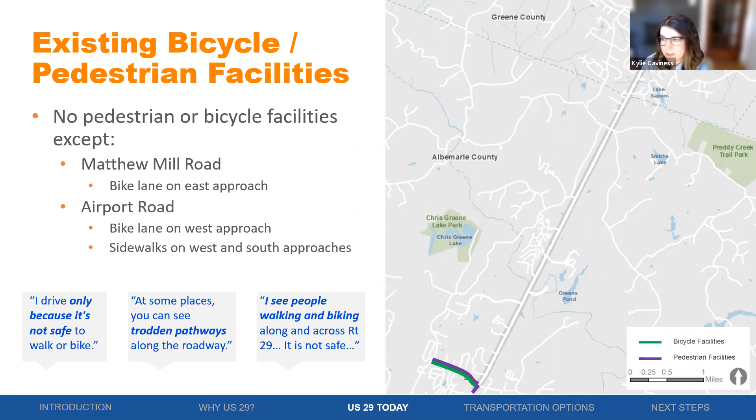Similarly, there is a lack of existing transit facilities and stops on the corridor. 2 transit services do run in the vicinity of the study area, Charlottesville Area Transit, otherwise known as CAT, and Jaunt. Both of those are stakeholders with us for this study. Jaunt runs a connect line for commuters into Charlottesville. Its closest transit stop is about 900 feet south of Airport Road, which is technically out of our study area. CAT's closest stop is actually 3 miles south of Airport Road, again getting closer to Charlottesville.

But similar to the bike ped facilities, feedback from the survey showed that there is a desire for transit facilities throughout the study area. Specifically, themes revolved around transit opportunities to hospitals, down to Charlottesville, other retail areas closer to the city, as well as transit being increasingly helpful for the aging population up north.

Now shifting a little bit into crashes along the corridor, we pulled crash data from 2015 to 2020 to get a sense of existing safety conditions. There were 798 crashes between those years, with 33% reporting injuries or fatalities.

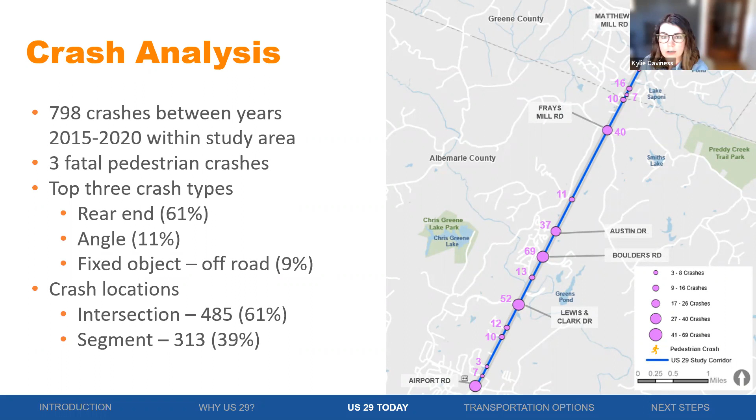So now for traffic operations, level of service, otherwise called LOS, is a metric that we use to determine the quality of an intersection. It's based on a scale of A through F, where A is ideal free flow conditions, and F is poor, significantly delayed conditions. In urban conditions, we aim for level service D or better.

There is more of an operations concern during the morning rush hour, which makes sense given the heavy southbound traffic through down to Charlottesville, which are likely commuters. In addition to the LOS results, 2 intersections operate over capacity, meaning that the volume of the intersection exceeds what is actually able to be processed. Those intersections are US 29 at Frays Mill Road and at Airport Road.

Looking at existing conditions in the PM, we see a less strained corridor with overall less capacity and level service issues. Still, there are 2 intersections operating worse than LOS D, and Airport Road is over capacity.

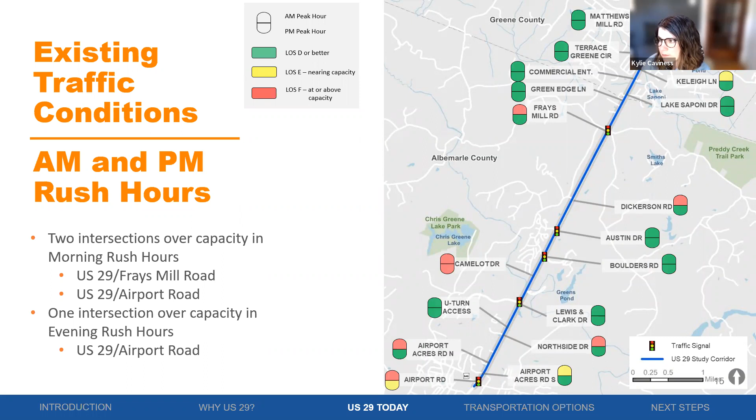There are some planned improvements along US 29 moving forward in the study corridor before we look at future conditions. The largest roadway improvement is the Route 670-607 connector, anticipated to be a 2-lane road connecting Route 670 and 607 to US 29 by 2025.

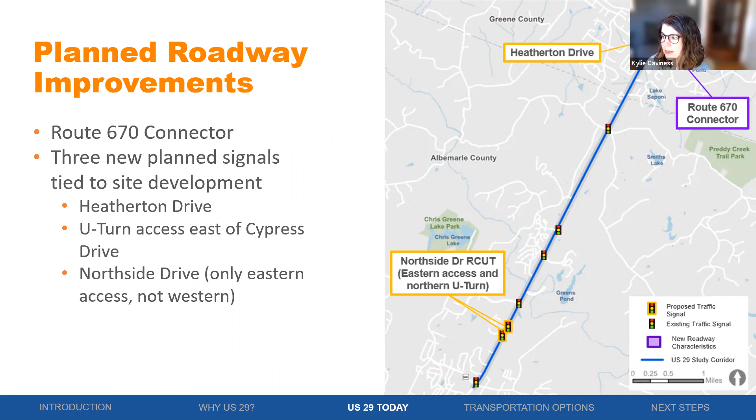Three new signals are also planned and tied to site development: Heatherton Drive up north, the eastern access, and the northern U-turn at the Northside Drive R-cut, which has recently been put in. In our no-build conditions, we assume a future year of 2045, as Andy said, and we analyze the corridor assuming these improvements are in place.

In the future no-build traffic conditions, a growth rate was applied to volumes based on the statewide planning system historic growth graphs. In the AM, a number of intersections operate at level of service E and F, and 5 intersections are over capacity, which is 3 more than what we saw in existing conditions.

In the PM future no-build conditions, we see more intersections operating at LOS E and F than under existing conditions. 6 intersections are over capacity as opposed to only 1, which was Airport Road in existing conditions. So this is a synopsis of what we've looked at—crashes, facilities, and operational conditions for our study so far.

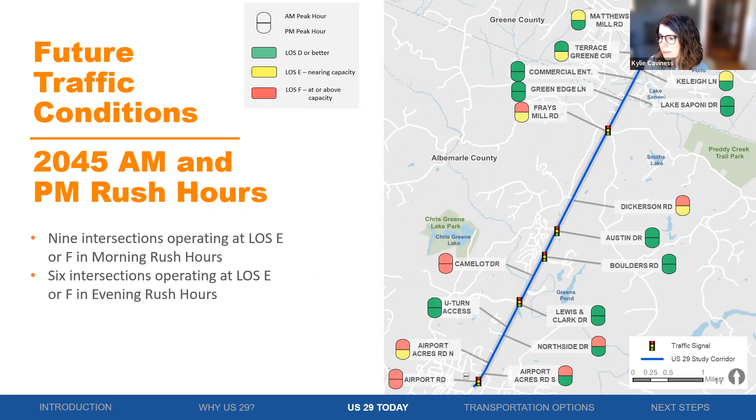As I stated about the comments earlier, the quotes I was pulling—we did release a survey in tandem with the public meeting last September, and we asked for your input related to the project study goals and your priorities.

What problems do you face? What opportunities do you imagine for the corridor? This allowed us to gather qualitative and quantitative data from you all, and we received over 370 responses to the survey. So thank you.

We also asked what transportation issues and opportunities people see for US 29. Participants could select more than one answer for all the questions we provided. We found that 92% of participants observed congestion and queuing, along with 63% reporting speeding, and nearly 40% reporting lack of pedestrian and bicycle crossings.

When we asked what investments would improve the driving experience, we found that 80% of respondents chose reduced congestion and queuing. We also found that 57% voted for intersection improvements and 42% voted for reduced turning conflicts.

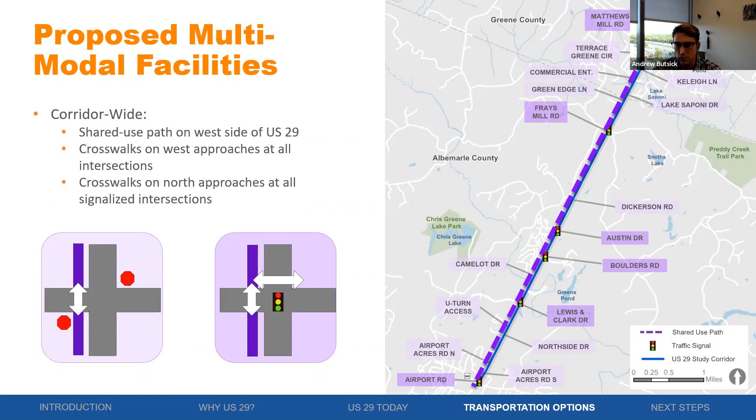For all intersections, there'd be a crossing on the west side to cross the side street, and at signalized intersections, a signalized pedestrian crossing along the north leg, so pedestrians and bikes can safely cross US 29. If you cross at an unsignalized intersection, it's a little less safe, because it's harder to control vehicular speeds. But I think this will go a long way toward improving pedestrian and bike operations, and hopefully in the future lead to the ability for transit along the corridor. Right now, if you were to just add stops along the corridor directly, there aren't many places for pedestrians and bikes to safely access the adjacent land uses from there.

Before we get into some of the individual alternatives at the intersections, I want to provide a high-level overview of some of the innovative intersections that came out of that VJuST analysis, as I mentioned earlier, which screened for over 20 at-grade intersection types. I'm not going to present all 20 - I think there's only a handful that make sense along this corridor.

The first one is a restricted crossing U-turn, or R-CUT for short. If you look at the graphic on the right, imagine US 29 running horizontal along the page and one of the side streets running north-south. This intersection redirects left turns and through movements from the minor streets to make a right turn at the main intersection - highlighted by the purple or maroon line. So they make a right turn at the main intersection instead of a left, travel downstream, and make a U-turn at a new median opening. After making that U-turn, they either make a right turn to complete their through movement, or continue through to complete their left turn movement.

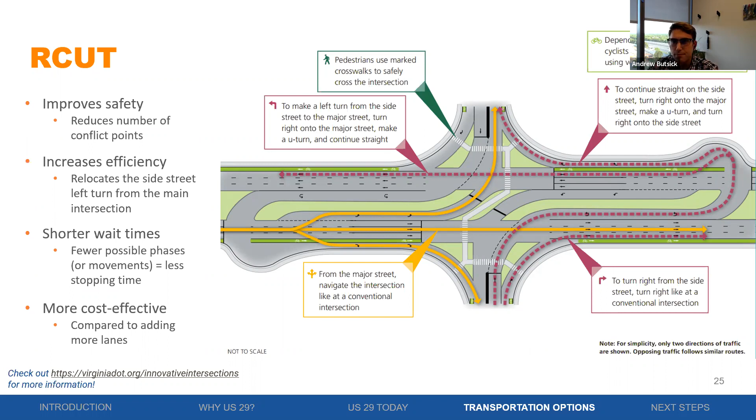The benefits are similar to the R-cut, a bit different in how movements are served, but it redirects those left turns and eliminates left turn phasing at the main signal. This reduces conflict points and the potential for high severity angle crashes, T-bone crashes at the intersection. It improves operations because you're removing signal phases.

It makes it more efficient for all movements, so all movements will see a benefit in travel time at the intersection, even though there's a little out-of-direction travel for left turns. It still overall is expected to operate more efficiently for most movements in terms of travel times.

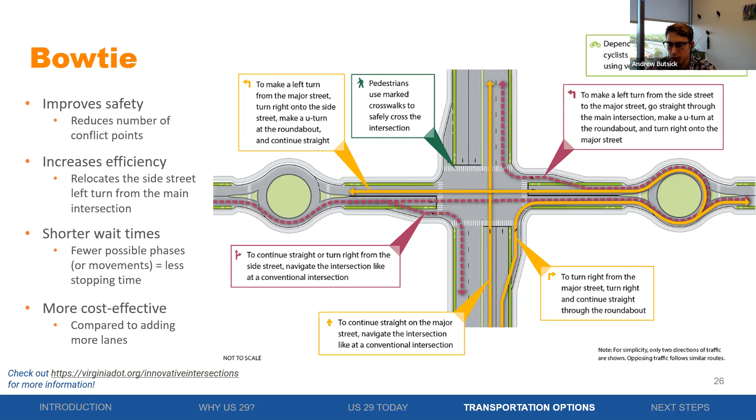The last one we're going to highlight tonight is a quadrant roadway. This option redirects left turns for all movements at the main intersection and shifts them over to a connector roadway, seen in the upper right. This new adjacent roadway serves those left turns.

You see a lot of the same benefits we talked about with the Bowtie and the R-cut at the main intersection, where eliminating those left turns helps improve safety by reducing the number of conflict points and the potential for angle crashes. It increases efficiency because you remove additional signal phases and provide more green time to all other movements.

But the one major downside to this is cost. Adding a new connector roadway isn't cheap, so you won't see us recommend this anywhere there isn't already a connector road planned or in place, because that can be cost prohibitive to design and add. Most places where we're implementing this, that natural connection is already in place.

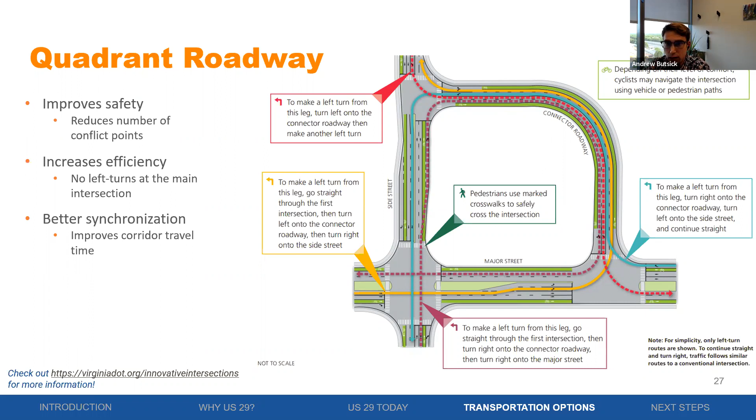Thanks, Andy. Just reiterating, these concepts are very much in the planning stage, no funding or schedule in place. We want to hear your thoughts and feedback on these potential ideas. So let's jump in. First, we have the intersection of US 29 at Matthew Mill Road. This intersection is along a segment VDOT has noted as a potential safety improvement location, with both safety and operational concerns. We have four alternatives at this intersection.

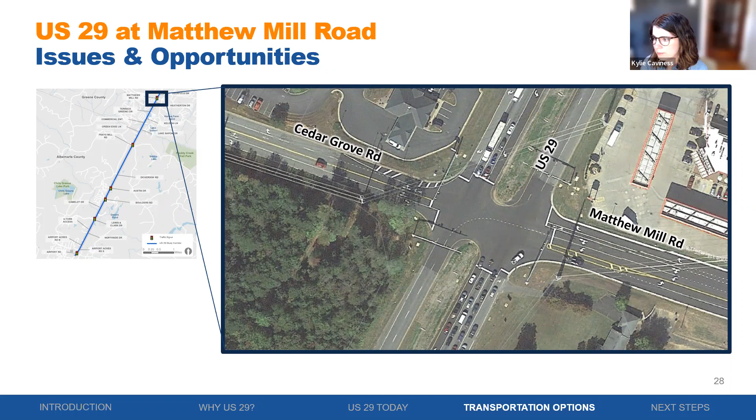This alternative is the modified signal with some adjustments to lane configurations. It modifies the existing signal to convert the minor leg, Cedar Grove and Matthew Mill Road, from split phasing to protected-permissive phasing. So instead of Cedar Grove Road all going at once and then everyone from Matthew Mill going at once, it would be a concurrent phase. Additionally, a separate left, through, and right lane are provided on the eastbound approach, which you'll see here.

The benefits to this improvement include reduced travel time. There's no need to redirect travel, everyone is going in the direction they are headed, and unlike an RCUT or a Bowtie, there's no rerouting needed. There are also added signalized pedestrian crossings on the western and northern sides of the intersection, as we specified in the proposed multimodal improvements. The challenge here is there's some right-of-way acquisition that would be needed for the additional lanes.

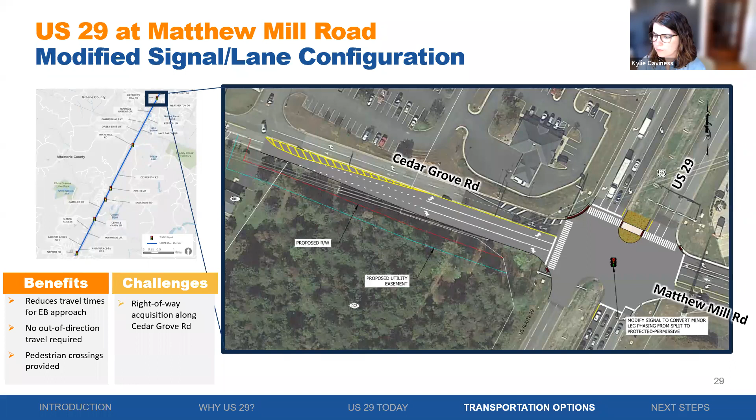I will say, while we move through these, they might seem a little fast. Once we get through them all, we'll talk about next steps, and there will be an opportunity for you to take a look at them in more detail and depth and provide us that feedback, instead of me spending 30 seconds on each alternative here.

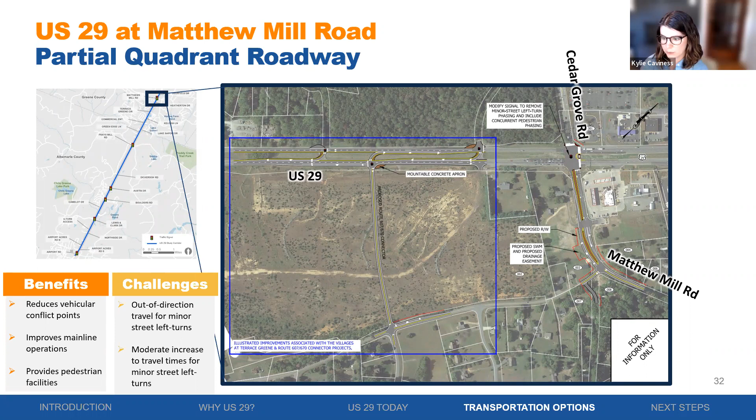All right, so jumping south a little bit, we have the intersection of US 29 and Frays Mill Road. Today, this intersection is identified by VDOT as a potential safety improvement location, with significant operational concerns. We had 3 alternatives for this intersection to share with you today.

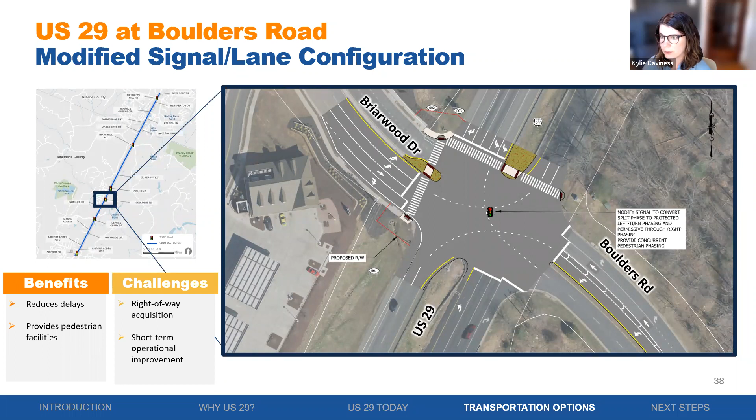We also have an R-cut, which converts the intersection to direct Boulders and Briarwood traffic to make that right turn and make the U-turn at the proposed median breaks.

Again, this means reduced travel time and the addition of pedestrian signals. Most importantly, comparing the two alternatives, you're reducing the risk of angle crashes by removing those conflict points.

The challenges with an R-cut compared to a signalized modification are that it's more costly. Some right-of-way will need to be acquired, and some minor out-of-direction travel is needed for those trying to make a left or a through movement on Boulders or Briarwood Drive.

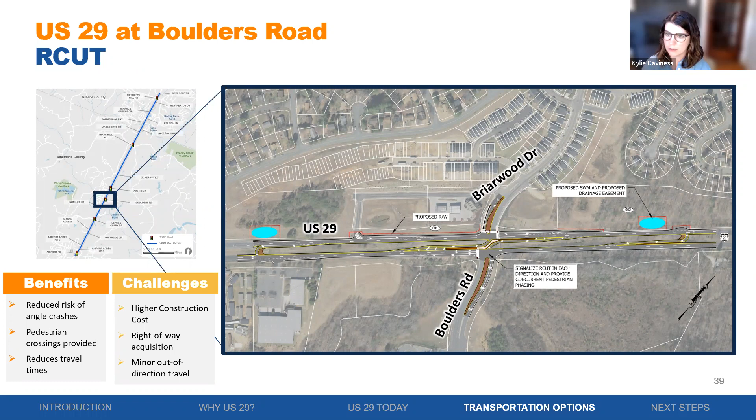Next we have the intersection of US 29 and Camelot Drive. Today this intersection is along a segment identified as a potential safety improvement and has operational concerns.

Today it's unsignalized, and we have one alternative for this intersection, which is in essence what we call a limited access modification, sort of like a light R-cut. It limits access by converting the intersection to restrict left turns and through movements.

The difference here is that Camelot Drive actually connects further north with Briarwood Drive. So the challenges with this one are that it would require some out-of-direction travel.

But those who need to turn left from Camelot to go northbound on US 29 would be able to access US 29 further north at Briarwood Drive, at that signal or R-cut.

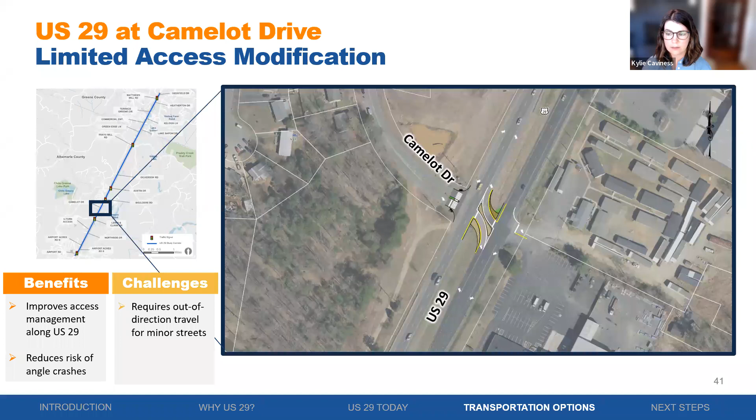Moving further south now to Lewis and Clark Drive. Today this intersection is listed as a priority, potential safety improvement intersection, and has significant operational concerns. We have two alternatives for this intersection.

I think we have three total more to go.

The first alternative is the modified signal and lane configuration. This adds a second signalized left turn lane on the eastbound approach. Benefits include reduced delay and conflict points, plus added pedestrian facilities.

Those pedestrian facilities would be signalized and provide multi-stage crossings for the channelized right turn lanes. The challenge here is minor right-of-way acquisition, just for the added turn lane.

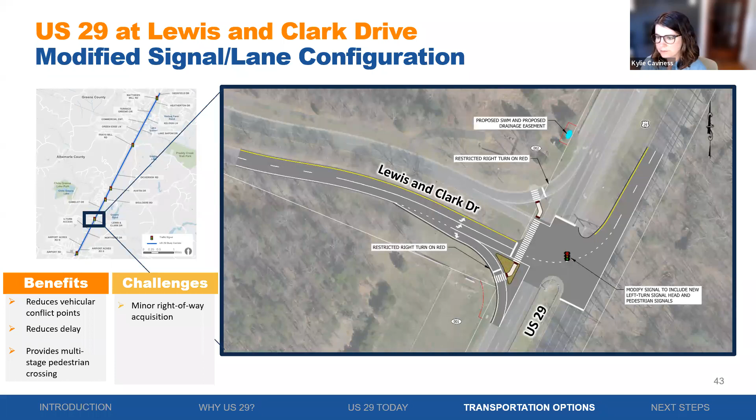The R-cut alternative converts the intersection to direct all minor approach vehicles to turn right. In this case, we don't actually have that fourth leg here.

The R-cut assumes future development occurring to the east. Actually, I think we meant to show an R-cut that does not assume this fourth leg.

Regardless, the benefits to the R-cut here are reduced delay, an added pedestrian signal, and a reduction of angle crashes. The challenge is that it's more costly, and some right-of-way would need to be acquired.

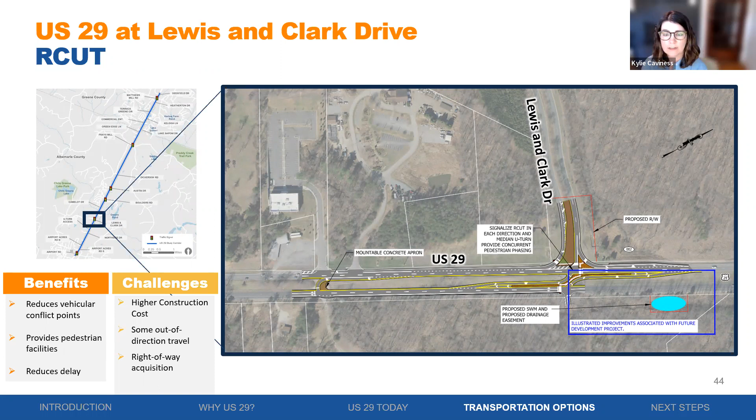Some minor out-of-direction travel is also needed for vehicles.

Lastly, we have the intersection of US 29 at Airport Road. Today this intersection has significant operational concerns as well as safety concerns. It's also the furthest south intersection in our study area, the most dense, getting closer to the city of Charlottesville.

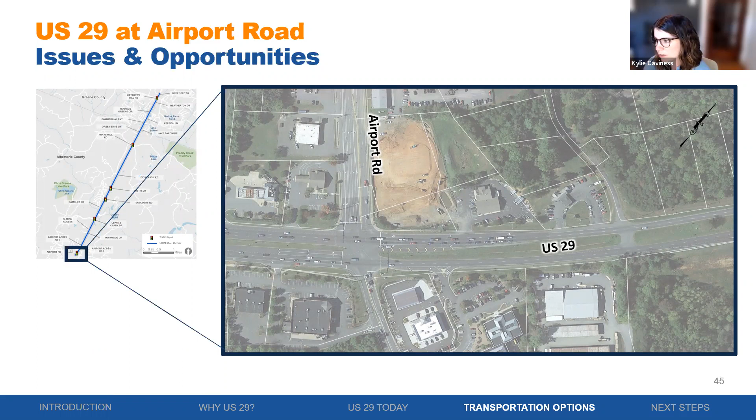We have one alternative for this intersection. It adds a third receiving lane northbound, ending at the new driveway on US 29 across from the northern Airport Acres Road approach.

A separate right turn lane is also added in the southbound direction, instead of the shared through-right that is there today, and pedestrian signals are added as well.

The benefits to this improvement are the pedestrian facilities, reduced delay, and no out-of-direction travel being needed. There is minor right-of-way acquisition needed for the extension of this receiving lane, as well as the additional southbound right turn lane.

As I said, this is a lot of content to run through in a short period of time. However, we do have opportunities for you to take more time to look over, process, and gather your thoughts, and share your feedback on these ideas with us that we've developed. I'll pass it over to Andy to share more now.

So yeah, we have these preliminary alternatives, but what are the next steps? The next one, as Kylie mentioned, is to get your feedback. We would love to hear from you about these. We presented a few different alternatives for each of these intersections, so we'd love to get your feedback via the MetroQuest survey, and we'll have Sai drop the link to this survey in the chat.

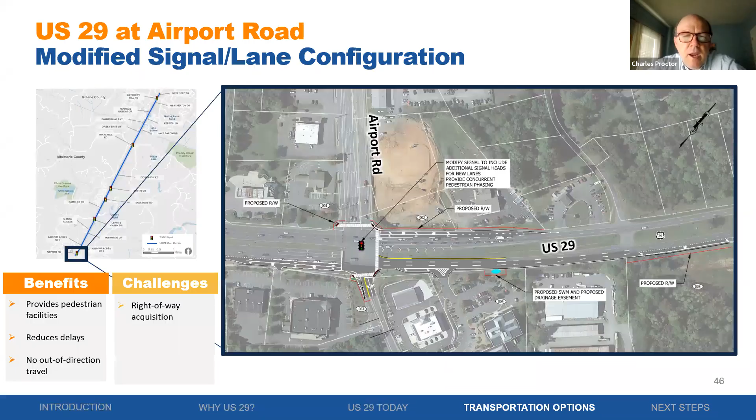Barb, yeah, that was related to the bow tie, I think, and the way the bow tie works, which is what I was trying to say. Basically we're relocating all the left-hand turns at the 29 intersection. To make the left-hand turn, you would have to make a right onto Matthew Mills or Cedar Grove Road, then make the U-turn at the roundabout, and then go back through the intersection to complete the left-hand turn. If you're on the side streets and making the left-hand turn, you would go through the intersection to the roundabout, U-turn, and then come back to the intersection and make the right. Hopefully that is clear to you, Barb. Okay.

Do you hear me? Yes, we can hear you. Okay.

I'm talking about if I'm going west on Matthew Mill Road, coming out of Preddy Creek Road. Is there going to be a roundabout right there at Preddy Creek and Matthew Mill? If we're building this bow tie solution, it would require a roundabout on both sides of this main intersection at 29, so yes, there would be one there. So you go to the roundabout, go to Route 29, make a right-hand turn, go down to where we're making our U-turn, and then go south on 29.

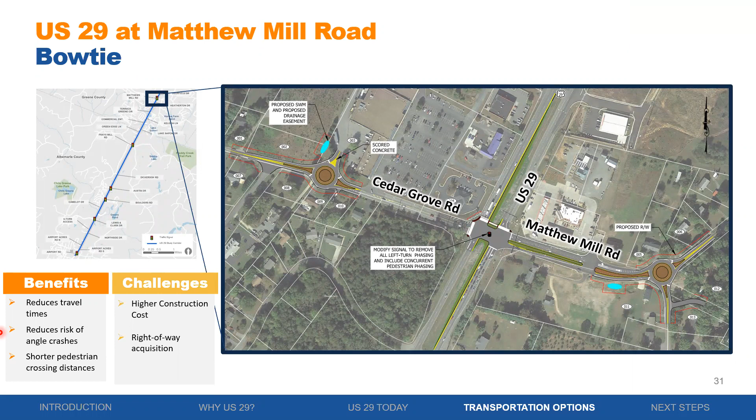What this solution tries to do is eliminate the number of movements at the main intersection and increase the efficiency of the intersection. Are the people from Frays Mill Road going to have to do about the same thing whenever they make their right turn onto 29? Well, that was what was proposed originally in the study. For this one, we're trying to get feedback from the public on which of the alternatives they'd like us to move forward with. That's what we're here to do, to present these and get feedback.

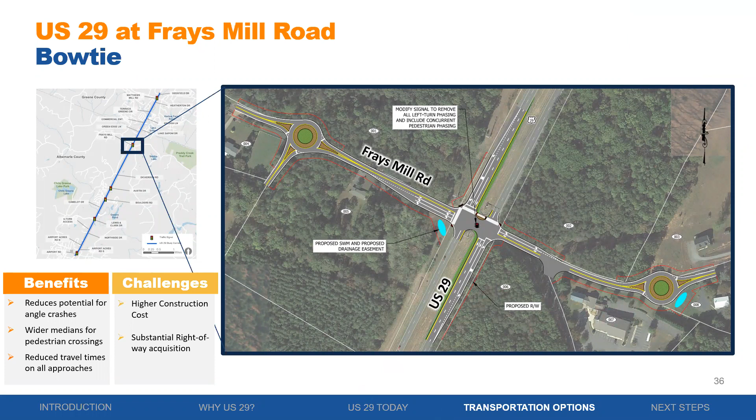Okay, in 2024 supposedly they're supposed to do the improvements on Matthew Mill Road. Is that going to start with all this in 2024, or what are they going to do on Matthew Mill Road in 2024? I don't think there's anything planned for Matthew Mill Road. The plans are for the connector road from 670, which is Preddy Creek Road, over to 29, and then they're going to be making improvements out on 29 just south of Matthew Mills Road. That's a separate project that's already funded and under design.

Okay, how do I find out about that project? You can go to the website, they have a project website which has that information. I don't have it right now, but let me see if I can pull it up. It's here. They may not have posted it. Yeah, here it is, 670 connector. I'll post the link in the chat, and you can get the information on that project. Okay, thank you.